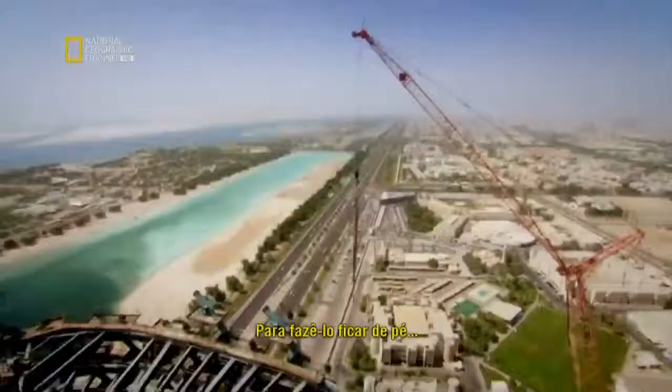Dubai is famous for its audacious engineering projects. But now, its neighboring city, Abu Dhabi, could surpass them all. This is Capital Gate, the most inclined skyscraper on the planet. It defies gravity, leaning at almost 5 times more than Italy's Leaning Tower of Pisa. To make it stand up, it'll take some extraordinary engineering that could rewrite the skyscraper rulebook.

Situated on the edge of the Persian Gulf lies the Sheikhdom of Abu Dhabi. It's the largest and richest of 7 states that unified in 1971 to form the United Arab Emirates. Abu Dhabi is undergoing one of the biggest makeovers of modern times. Its ruler, Sheikh Khalifa bin Zayed Al Nahyan, wants to join the City Super League. And he's spending over $200 billion to transform his capital into a world-class business and tourist destination.

He's already spent a reputed $3 billion creating the most expensive hotel ever built. The Emirates Palace boasts 114 gold domes and is the height of luxury, where rooms cost up to $12,000 a night. And that's not all. He's built one of the largest and most opulent mosques on Earth. Capable of accommodating 40,000 worshippers, the Grand Mosque boasts the largest carpet on the planet and the world's biggest gem-encrusted chandelier. But even these structures have not quenched his thirst for the extraordinary.

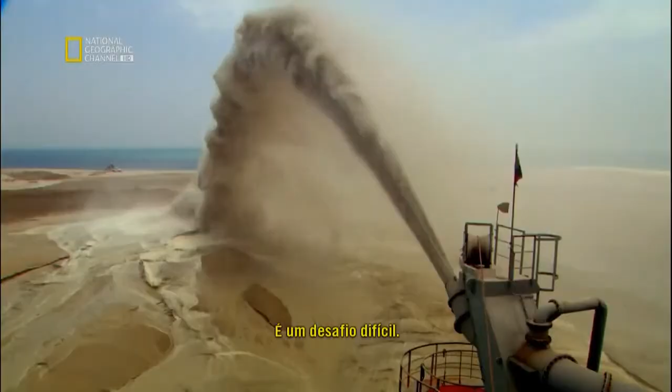It's a tough challenge. This is a land where extreme engineering is the norm. Neighboring Emirate Dubai has already built the world's tallest skyscraper, the 828-meter-high Burj Khalifa, and an iconic luxury hotel, the Burj Al Arab. Sheikh Sultan signs up a team of architects and gives them a clear brief, not to go bigger or taller, but to challenge the rules of architecture.

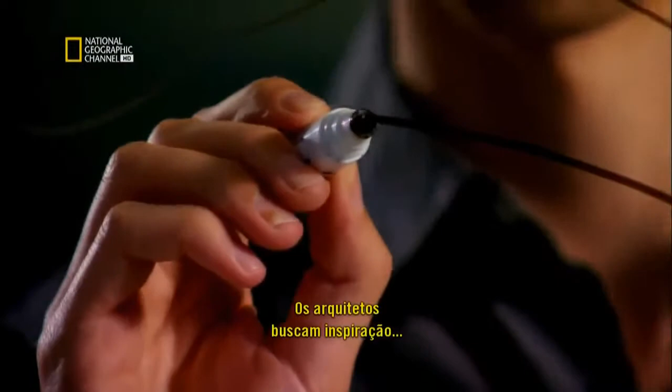For Neil van der Veen, one of the concept architects, it's a unique opportunity. The spirit of the times in the UAE was that anything was possible. Really, you could do anything. We can do something in the architecture that will represent that Abu Dhabi is right at the cutting edge. The architects look for inspiration in Abu Dhabi's landscape. They find it in the wind-swept dunes and the rolling waves of the Persian Gulf. We took this idea of wind and water, which are both dynamic, fluid type of rhythms of nature, and we said, how can we capture those in time?

As a result, you get a much smoother phase. I was really very happy when we first saw it, because with such a building, you get the first impression from the first few seconds. The team come up with an extraordinary design. A tower that spirals out of the ground to 160 meters. Inspired by a desert whirlwind and the splash of a wave rising over the sand. This gravity-defying skyscraper tilts almost 5 times more than Italy's Leaning Tower of Pisa. No single angle of this tower is the same as another. It's a structure guaranteed to amaze.

We really wanted this to happen. They could see a vision suddenly. They could see something that would stand for them. Then there was no stopping us. Sheikh Sultan wants the lower floors to become the most prestigious office address in Abu Dhabi, with the top 18 levels assigned as a 5-star hotel fit for royalty.

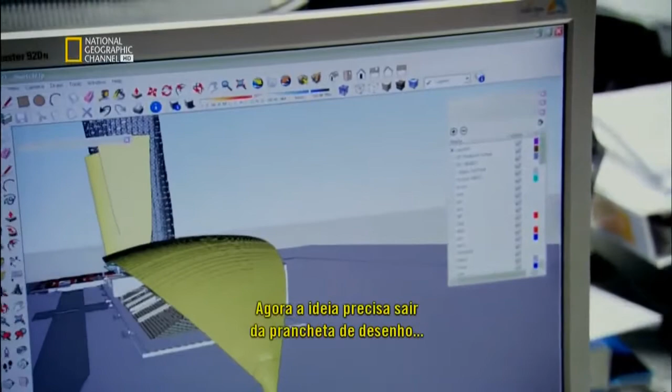Now, the idea must make the leap from the drawing board to the construction site. The only problem is, no one has ever attempted a skyscraper like this before. Everyone realized that this is a crazy structure to build, and how are we going to build it?

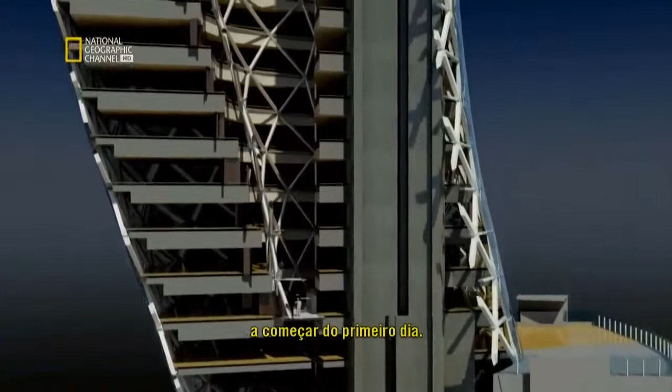To make Capital Gate's gravity-defying design a reality, it'll take some extraordinary engineering, and the challenge begins on day one. Its top floors overhang its base by 33 meters, creating huge forces that want to rip the building's foundations out of the ground.

At the construction site, project architect Tony Archibald is daunted by the task ahead. When I first joined the job, I was shown the drawings, and I kind of did a double take, and I wasn't quite sure that I got the correct understanding of the project, and it took me a few moments before I realized what we were about to undertake.

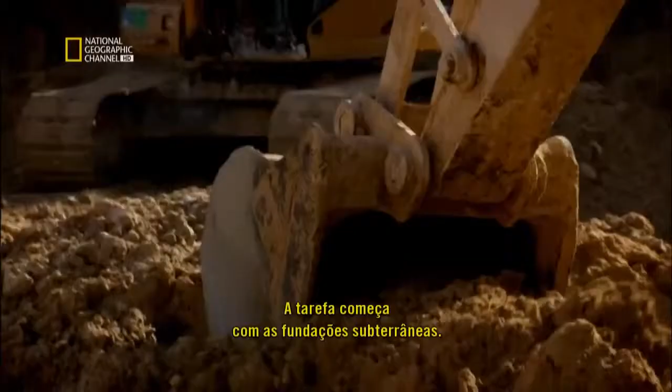Keeping Capital Gate upright is a huge engineering challenge. There isn't just one solution. To overcome the forces of gravity, it will take a whole range of pioneering techniques. But the task starts with the foundations, deep underground. On one side of the building, the weight is going down into the ground. On the other side, it's being lifted out of the ground. And that's due to the large overhang that we're having to deal with.

The solution requires almost 400 concrete piles that work in two different ways. On the leaning side, half of the piles push the overhang's forces into the ground. On the opposite side, the remaining piles anchor deeper into the bedrock. They resist the stretching forces trying to wrench the building out of the ground.

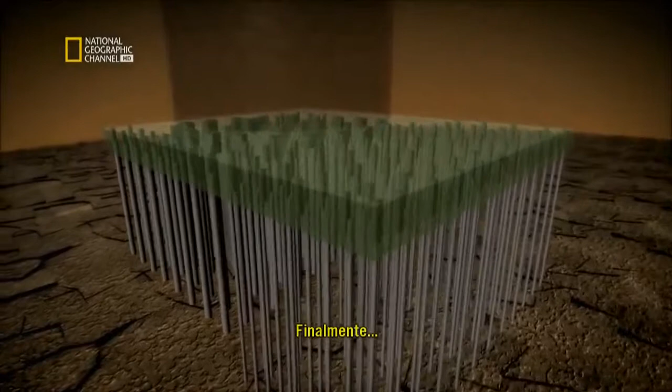Finally, to evenly distribute Capital Gate's forces into the piles, a deep concrete slab reinforced with steel is laid on top. What the foundations taught us is that every single aspect of this building has to be custom engineered.

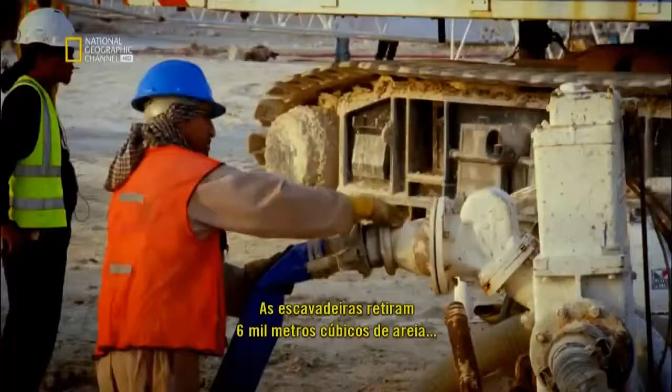Excavators dig out a colossal 6,000 cubic meters of sand. And over 8 weeks, hundreds of piles are driven into the ground. We had an awful lot of piles to put in very close proximity. It was a real difficult challenge. There can be no let-up on this schedule. Sheikh Sultan wants Capital Gate complete by an impossibly tight deadline.

In less than 2 years' time, Abu Dhabi will host the World Future Energy Summit. Over 3,000 delegates from 50 countries and the world's press will convene at the neighboring Abu Dhabi National Exhibition Center. It's the perfect opportunity to showcase Capital Gate and prove Abu Dhabi is at the forefront of innovation.

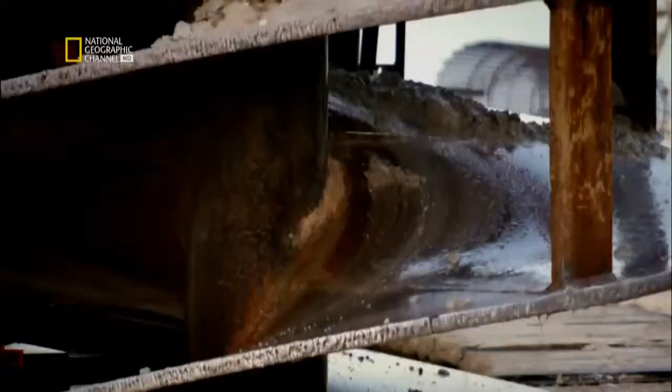But this gives the team just 24 months to design and build a unique skyscraper. With the foundations finished, building above ground can begin. But because of the dramatic lean, it will have to be constructed in a very different way to a conventional skyscraper. We realized once we'd done the foundations that this was going to be the first of many difficult problems.

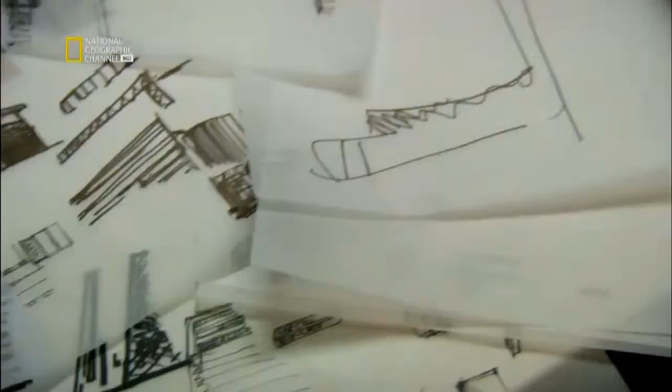A normal skyscraper requires a solid core to hold it upright. But Capital Gate's curves will just crack and topple a standard core. Engineers must discard conventional thinking and devise a way to defy gravity. Inspired by the nearby desert landscape and its wind-shaped dunes, architects have designed a curved, leaning tower. But it'll take some audacious engineering to stop Capital Gate from falling over.

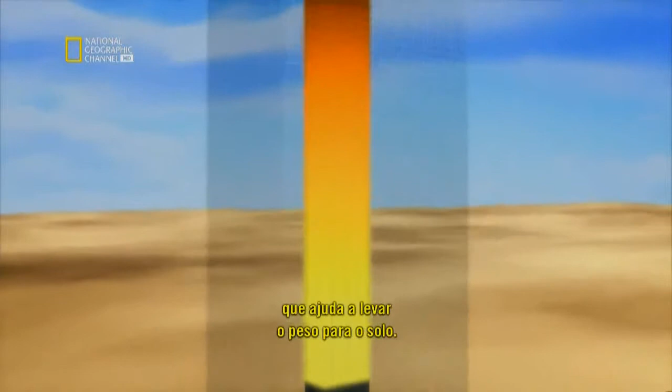Normal skyscrapers are built around a slim vertical core, which helps to channel the building's weight into the ground. There's so much overhang on this building that a conventional core was no way going to work. You just can't build a straight core. It's just not strong enough. Capital Gate's design would cause a conventional core to bend dangerously. The pull of the massive overhang wants to stretch the core on one side, causing the concrete to tear apart.

Structural engineer Mona Vassi knows it's a serious problem that must be solved. When I saw this one, I thought it's impossible, it's not going to work. It's just some sketch somebody left somewhere. But I always think that for the architects, it's easier for them to just draw something, but it's not easy for us to fulfill or satisfy their needs.

The engineers developed two groundbreaking solutions. The first part of their plan is to build the core with a curve, bending in the opposite direction to the building's lean. As the structure grows, its weight pulls the core straight. In total, it shifts 350 millimeters, and the effect is significant. The concrete that would have been stretched by the overhang's pull will now be compressed and strengthened.

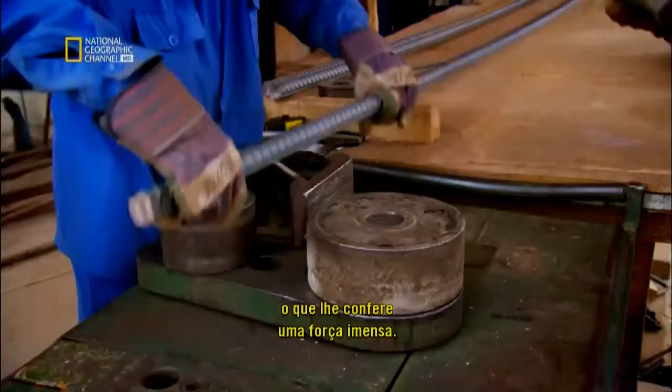The core grows 4 meters a week, and construction manager Les Fairchild is in charge of building it. This is probably the most complex core that I've come across. It's built at an angle, and effectively the core holds the whole building up.

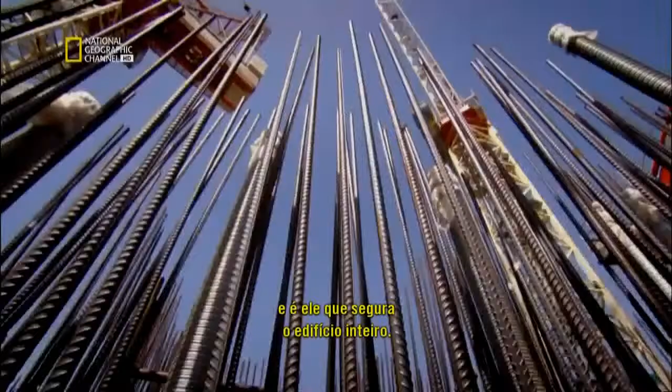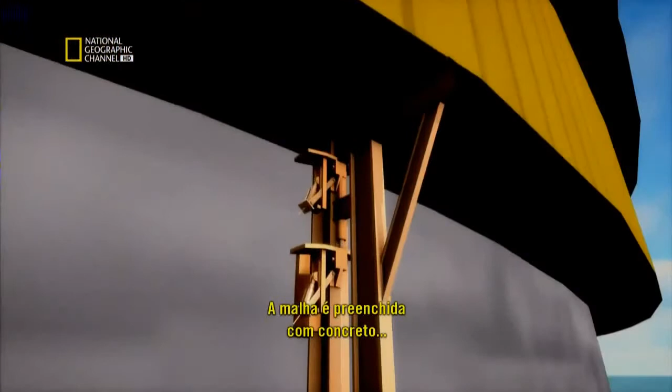The core is built using a technique called jump forming. First, a dense mesh of steel reinforcement is assembled. A mold then closes around the steel to form the shape of the core. The steel mesh is then filled with concrete. Then the mold or form can climb up the core wall for the process to start all over again.

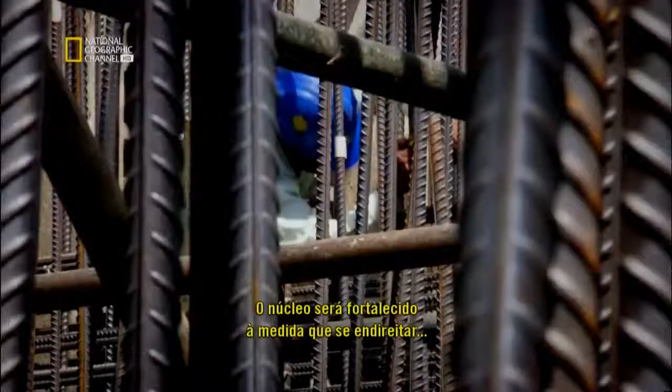Jump form is a hydraulic platform. Once we've cast each 4-metre level, we simply attach it to some runners and we jump it hydraulically up to the next level. The core will be strengthened as it straightens. But for the core to carry extreme loads, the concrete must be reinforced using steel rods called rebar.

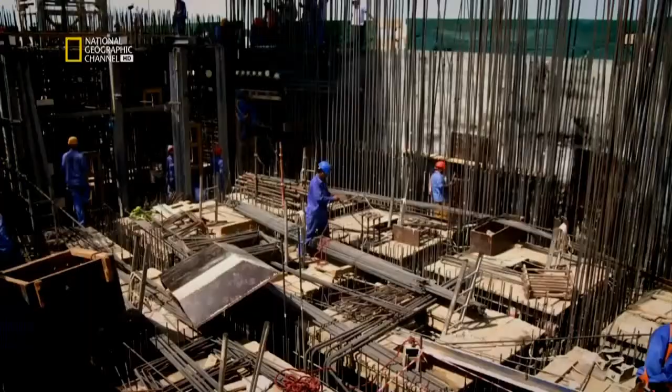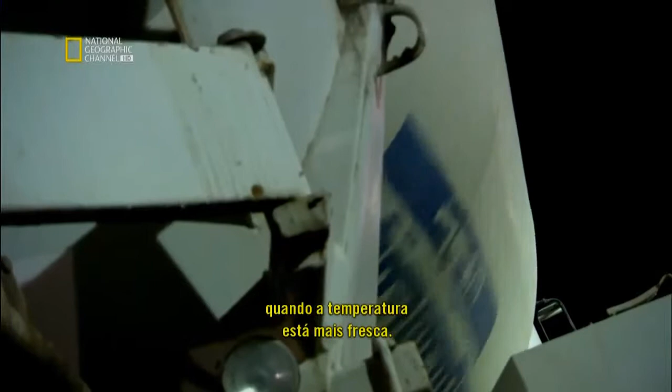The rebar is installed during the daytime, but temperatures of up to 50 degrees Celsius and concrete don't mix. It dries too fast and could crack. To set at the right speed, the concrete has to be poured during the cool of the night. As the core grows higher, the liquid concrete has to be pumped over longer and longer distances. So the consistency of every batch is first checked in a slump test to ensure it won't block the pipes.

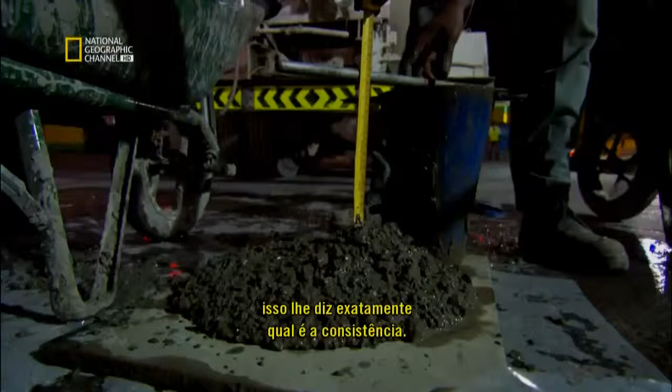When you first see it coming out the wagon, you can usually tell whether it's a tight mix or whether it's a loose mix, and that's what we're testing for really in the slump test. We simply make a cone, lift the cone off, and depending on how much it reduces in height, tells you exactly what the slump is. The one we just witnessed is 215 millimetres, which is within the specification, so that's good to go.

Whilst the truck drives to the pump, Fairchild needs to get onto the core. He can take the stairs, but 90 meters up is a long climb. He knows a much faster way. Crane lift.

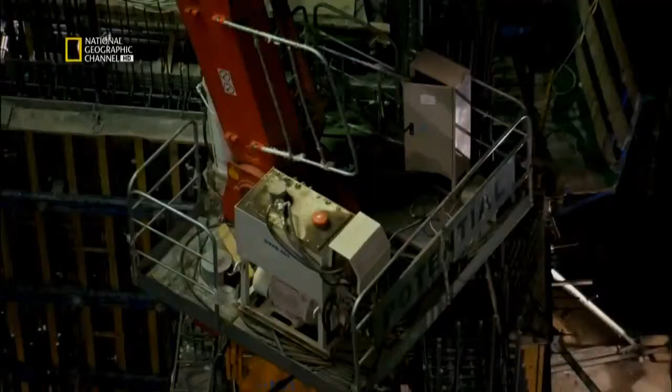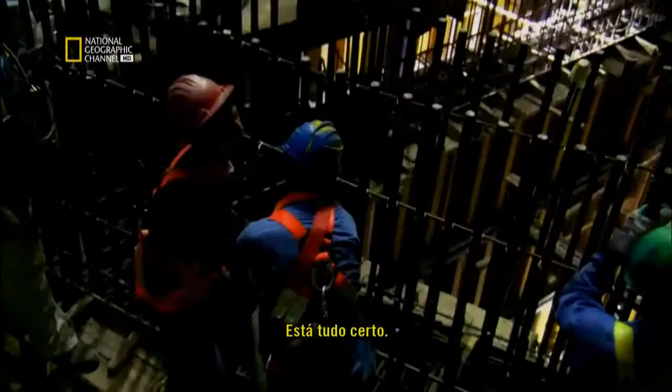It's going fairly well. We've had a nice continuous supply of concrete, and we're now pumping it up to the upper levels of the building. And the lads are just steadily working away. They actually work from one side to the other in metre deep layers, so they're doing everything right. It's always exciting when we pour concrete. It means it's another achievement really. We're going up another level.

But building the core out of alignment and packing it with rebar still isn't enough to stop gravity toppling Capitol Gate. What we came up with is a post-tensioning solution where we introduced much more reinforcement into the core wall and then used the tensioning process. Basically that was done by introducing high tensile strands to the centre of the walls.

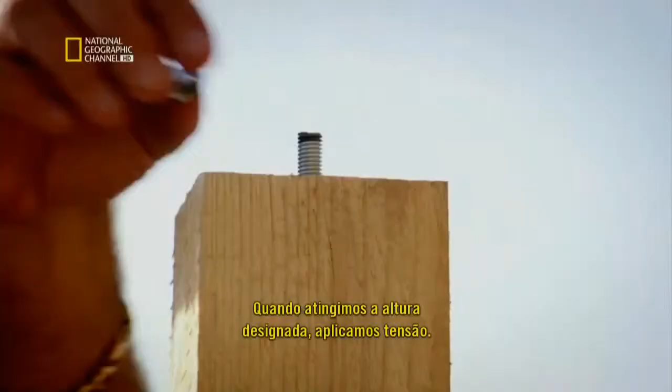When we reach the designated height, we simply apply tension. We're actually stretching the tendons that fall through the wall, and we're actually pulling them tight, and that's done by a tensioning machine. So effectively, when the tension is complete and the load was applied, the core would stay intact, and the additional reinforcement would prevent it from falling over.

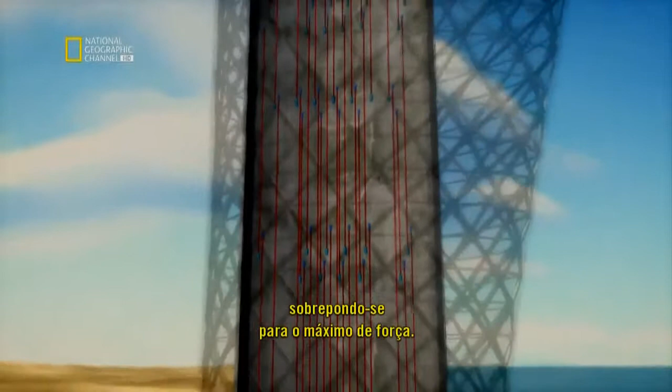To post-tension the core, 146 steel tendons are threaded vertically through the concrete. Each tendon is 20 meters long and runs through 5 floors of the building, overlapping each other for maximum strength. When the tendons are stretched, the stress counteracts the pulling force created by the massive overhang, stopping the concrete from tearing apart. Okay, stop. Okay, start moving.

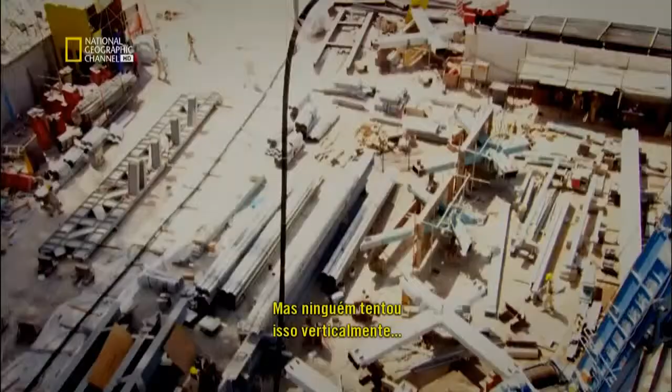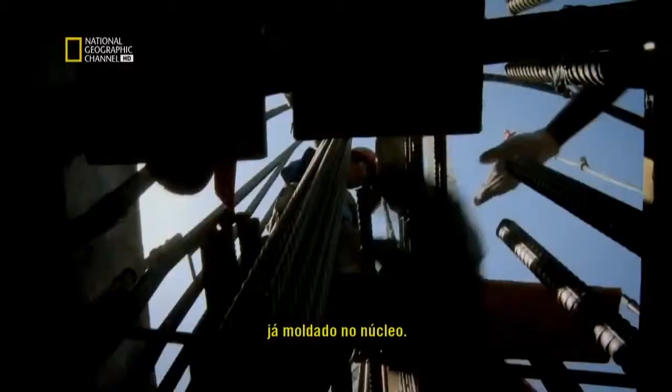On site, the team are post-tensioning the core, but no one has ever attempted this vertically in a skyscraper. The long tendon is lifted to the top of the core. The team used the steel tendon's weight to force it through a duct already cast through the core. Once the tendon is in position, the team lock off both ends, ready to tension its individual strands.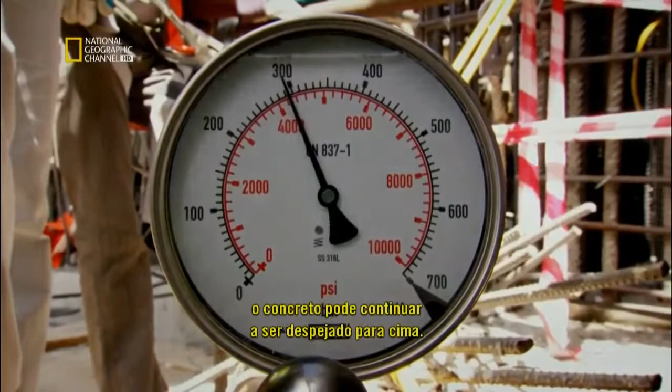A pneumatic jack clamps around one strand at a time and stretches it. It's equivalent to about 5 family cars pulling on one end of the rope. With the steel tendon now stretched to the right stress level, concrete pouring can continue upwards. The quantity of cable that's been used is approximately 120 tons and 120,000 meters in length. It's about 44 times the Golden Gate Bridge. This process is repeated over and over and means the core should withstand the huge loads generated by Capital Gate's extreme overhang.

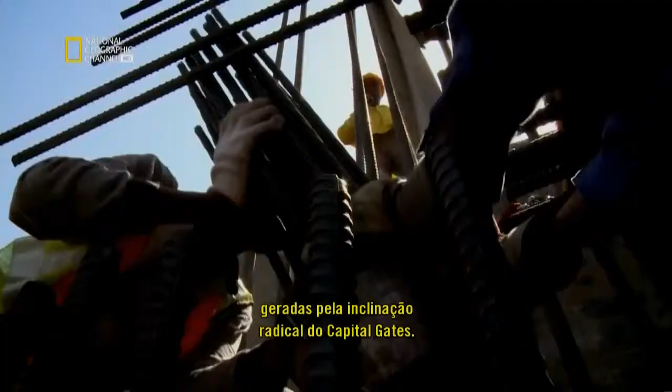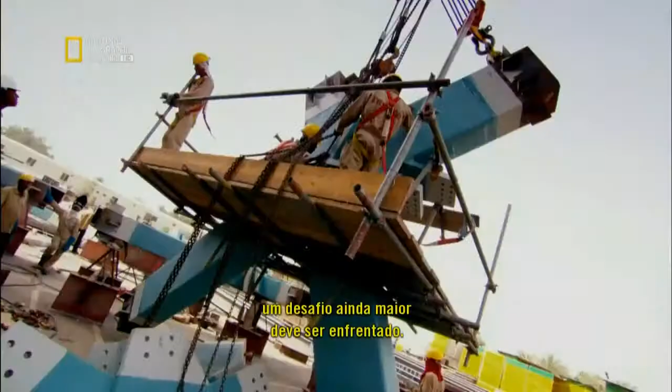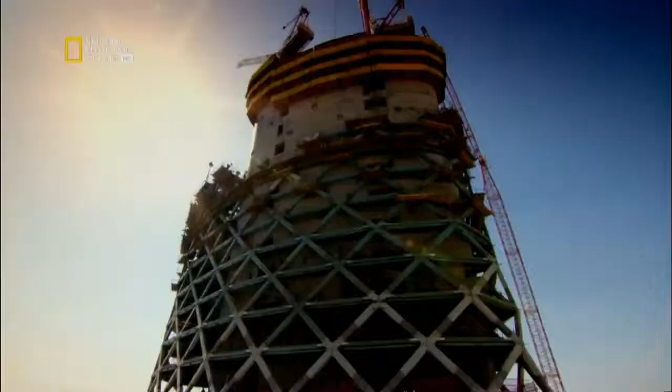But now, an even greater challenge must be tackled. The building's twisting, leaning design must somehow be turned from theory into reality. And once again, it'll mean bending the rules of architecture. To create Abu Dhabi's architectural icon, Capital Gate needs an exterior curved leaning frame. But once again, the building's extreme tilt creates a problem.

The shape of the building with this very pronounced overhang meant that traditional skyscraper building solutions just weren't going to work. There's no way. The building design requires it to be thin to maximize floor space and allow for huge panoramic windows. Irfan Ahmed is one of the engineers who has to find a solution. For structural engineers, it's always challenging to accept the architectural requirement, you know. They always want thinner and thinner and thinner.

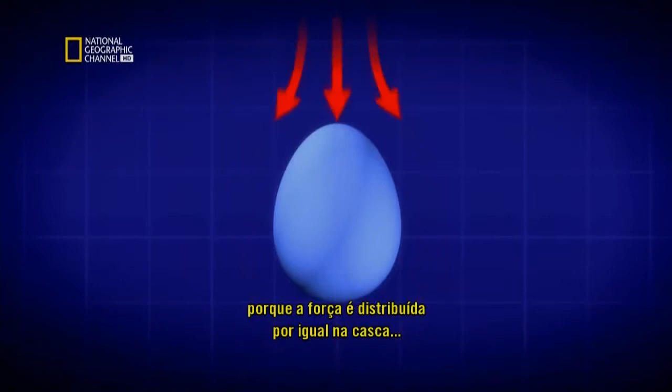Surprisingly, the humble chicken could help with this engineering dilemma. It is essentially a skin of structure around the outside of the building, not unlike an egg. An egg can withstand huge loads because it evenly distributes forces down through its shell, which means the shell can be thin, creating more space inside. So it's very, very thin, it's very, very strong. If I try to crush this egg, you can see that it's actually amazingly resilient. So let's see how resilient.

Here I have 170 eggs laid out, and we're going to put load on top of these in the form of breeze blocks. Moment of truth. So far, so good. Each one of these blocks weighs 15 kilos. So we've nearly got half the weight of a car on here now, on our 170 eggs. Let's see how far we can push this.

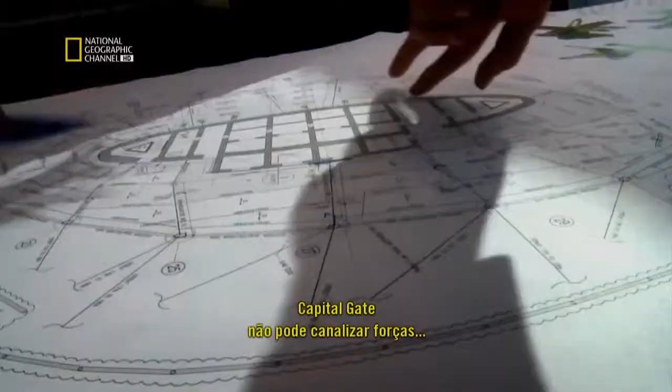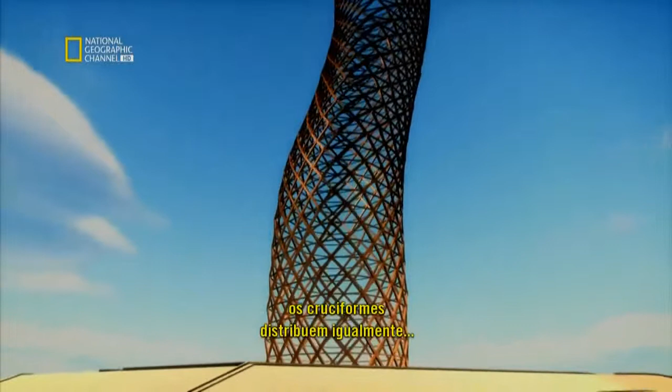Capital Gate can't channel forces with eggshell, but it can use the principle of how it works, using a diagrid. A diagrid is a giant mesh of steel that wraps around the core. Steel beams connect to a node or joint to form a cruciform section. 720 uniquely shaped sections link together to form the thin but immensely strong diagrid. Working together, these cruciforms equally distribute the forces down the outside of the building. The way it does that is by making a uniform net, so that the forces are very evenly distributed, and that means that we can get away with slenderer sections.

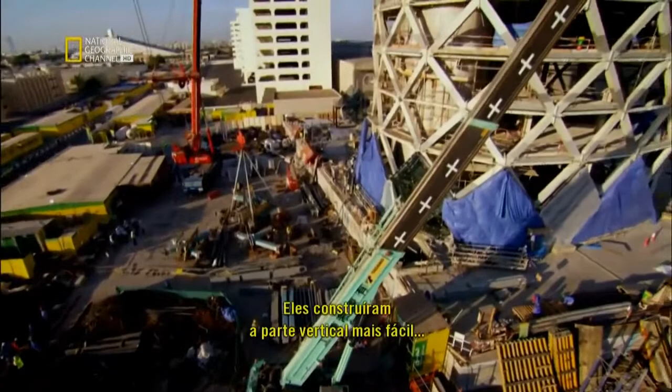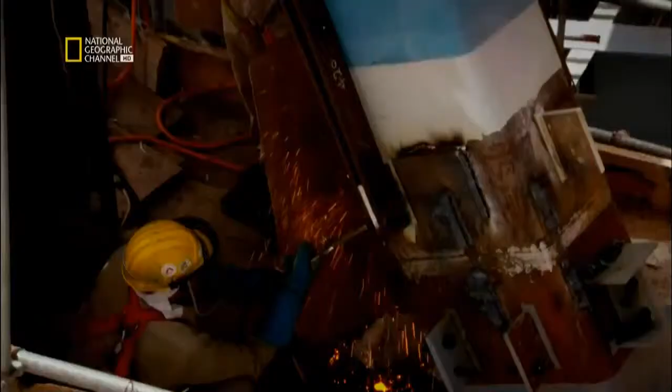On site, a team of 240 steel fabricators assemble the diagrid. They've built the easier straight part of Capital Gate's base, but now the structure is starting to lean, making installation even more challenging. Each cruciform, weighing up to 16 tons, has a unique geometry and must be crane lifted at a precise angle. If the diagrid is not assembled with millimeter accuracy, the mesh will not channel the loads and the structure could be weakened.

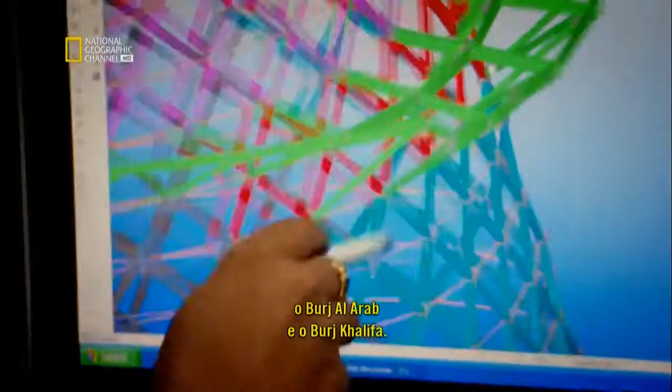The engineers must communicate closely with the expert steel fabricators. They design and manufacture the diagrid 150 kilometers away in the neighboring emirate, Sharjah. Here, cutting-edge construction is the norm. They've built one of Malaysia's Petronas Towers and Dubai's iconic skyscrapers, the Burj Al Arab and the Burj Khalifa. But Capital Gate's revolutionary design pushes even these experts to the limit.

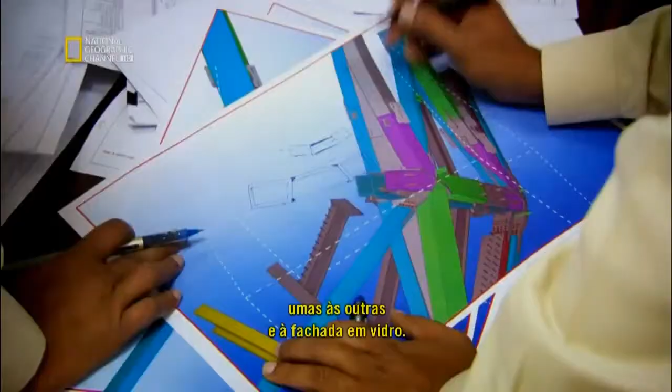On the planning floor, project engineer P. Bhaskaran and his team need bespoke 3D software to tackle the building's highly complex diagrid. The 3D modeling is done, and any unforeseen criticalities will be very clearly identified in the 3D model. Each one of the 720 cruciforms is precision engineered, not only to channel huge forces, but to connect with millimeter accuracy to the neighboring cruciforms and the glass facade. But to measure their exact angles, the team used some old-school technology: chalk. It might look unsophisticated, but it's highly accurate, ensuring all the elements will join together.

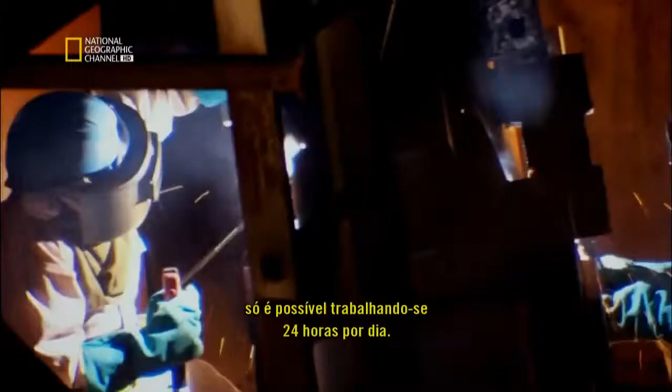To keep up with construction, the factory must produce 18 cruciforms every week. Constructing such a huge building, a critical building within the short span, without working 24 hours, it is absolutely not going to happen. As the skyscraper reaches new heights, the long hours start to pay off. This design pushes the diagrid technology to its absolute limit, and in fact far beyond what's ever been achieved so far. Even in your dreams, you're thinking about this project. So once you see the structure coming up, you forget all the long hours you spend and all the sleepless nights.

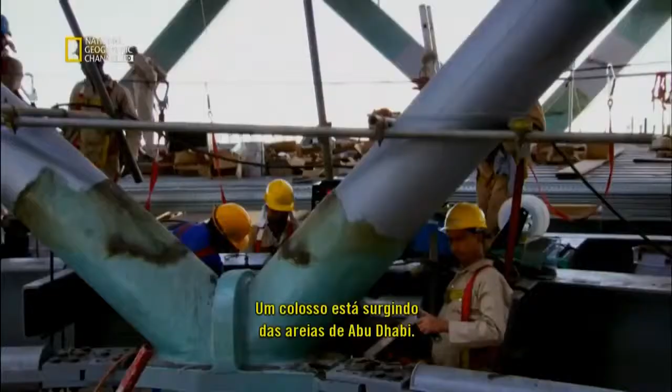A colossus is fast emerging from the Abu Dhabi sands. Now, this leaning tower must be clad with a glass facade. And as always with this gravity-defying structure, it's going to require some revolutionary engineering.

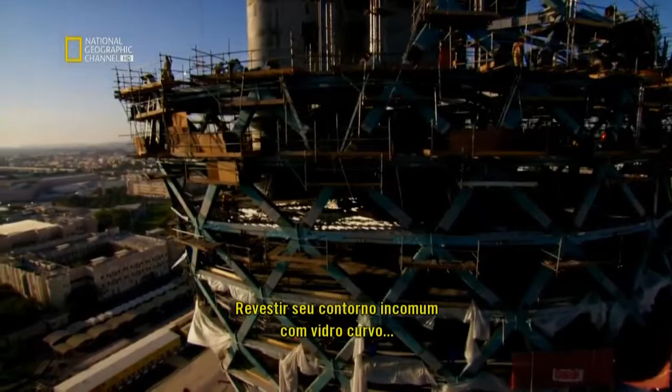Glazing Capital Gate's leaning curved frame is a major problem. Covering its unusual contours with curved glass will blow the budget. So the skyscraper's curves must somehow be clad using cost-effective flat glass panes. Fortunately, ancient Greek geometry can help.

Because you've got a complex shape, it's an organic shape, it's a curved shape. The only way to model that with straight lines is to use triangles. Triangular panes can pivot in 3 directions, and when joined together can cover complex geometric surfaces. But because every angle of the building is unique, it'll take 26,000 triangular panes to form the facade.

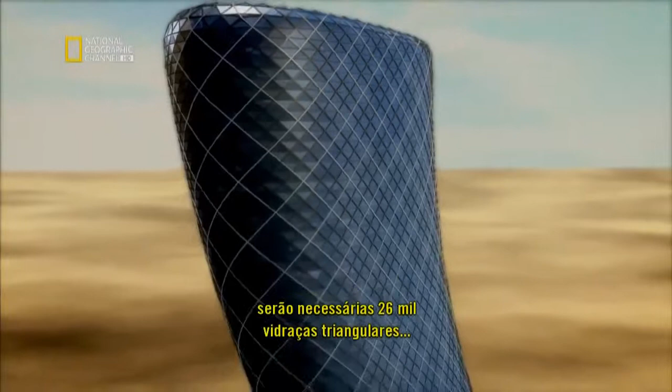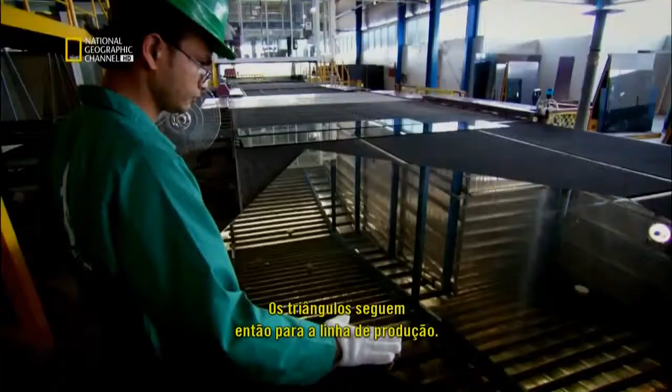With so many glass triangles to cut, the local glass factory springs into action. Each pane is scored by an automated diamond cutter to an exact pattern. The triangles are then sent along the production line. The team is under constant pressure to deliver enough glass to the site. Hey, this side, 2 guys, hold it.

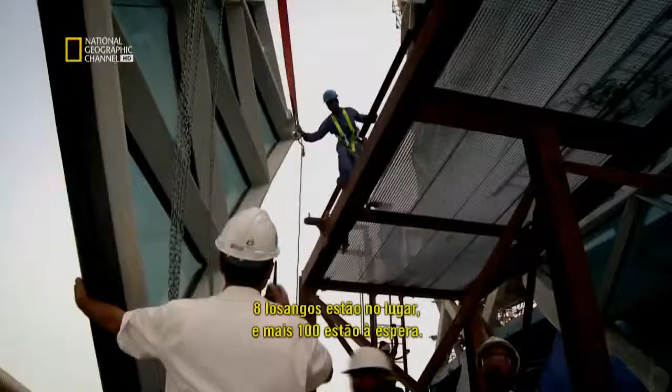After several weeks, 8 diamonds are in place and another 100 standing by. But the glass design is so unconventional, it still has to pass a number of tests to prove it's up to the job. Because we'd already started the glass installation, the results of this test were absolutely key. Each panel is stacked one upon the other. So if we'd had any kind of problem, we would have had to unstack them, which would have had disastrous consequences for the program.

This is no ordinary glass skin after all. Capital Gate's core straightens as it grows. The skyscraper will not stop moving until after completion. Normal glass facades can accommodate minute movements caused by wind and temperature changes. But to stop the glass shattering and keep the building watertight, the panels must be designed to shift by up to 20 millimeters. The scale of that kind of movement is almost unheard of in glazing systems. It's a vast amount of movement.

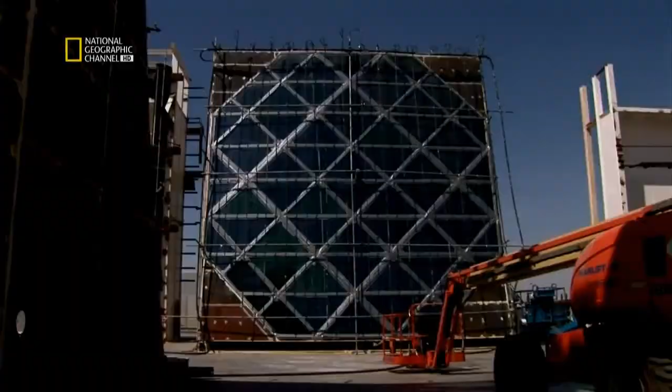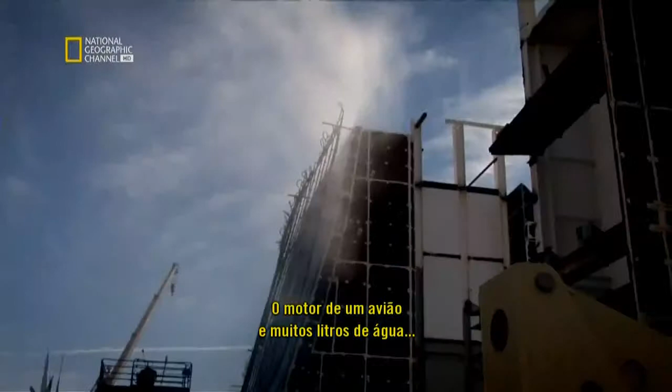With glass installation ongoing, construction manager Craig Rooney needs to know the panels will perform. We don't want to get to the top, we've done it, we've installed it, we think we've done a great job, and then it all leaks. The panels must be tested to the limit at a Dubai laboratory. A plane engine and many litres of water simulate worst-case scenario weather.

Now the moment of truth. Any leaks could be a disaster. And it's bad news. The first time we got a full water test, we had a leak. The fact that we had a leak was devastating to the whole team and very alarming. The diamonds connect to each other by a bespoke two-layer seal. The flexible spongy seal allows the diamonds to move and keeps water out. But if any water does seep through the outer seal, drainage tubes fitted at intervals let the water flow away.

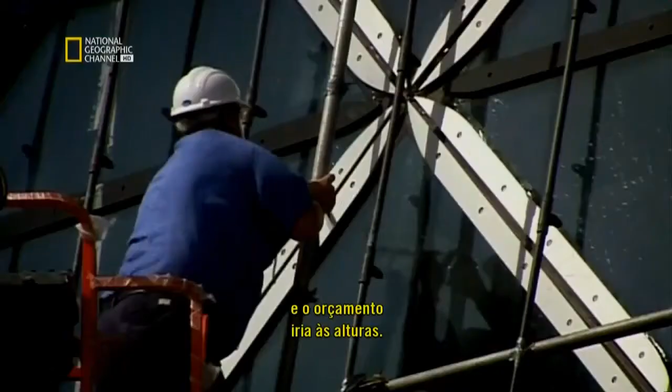The panel has failed the test. Water has flooded inside and penetrated the inner seal. If it was a fundamental failure, we're back to the drawing board, so the cost and the budget and the program all go completely out the window. The panel is examined. Answers are needed fast. Fortunately, it's not a design failure. They discover a drainage tube is only blocked with sand. The problem resolved, installation can step up a gear.

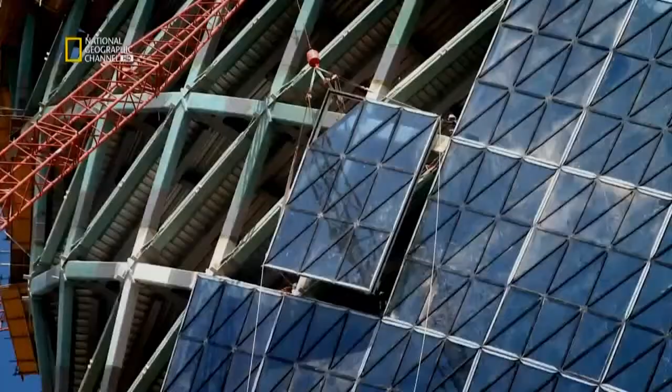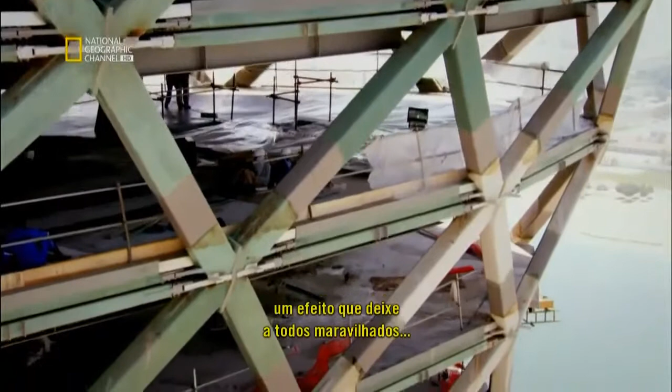But as always with this audacious building, one problem is solved and another is just around the corner. To give Capital Gate's five-star hotel lobby the wow factor, architects again plan to push the design to the extreme. Now they want to build an infinity pool and a restaurant, hanging 100 meters above the ground.

18 months into the build, Capital Gate's design is about to give a new slant on high-rise living. The architects want a pool deck and restaurant suspended in the sky, but it's an engineering headache. There's so many requirements that architects have that really put us in so much trouble as engineers, but you want to make sure you have a safe structure. The design calls for a two-story extension, hanging without any visible support. But the pool's water alone will weigh 150 tons.

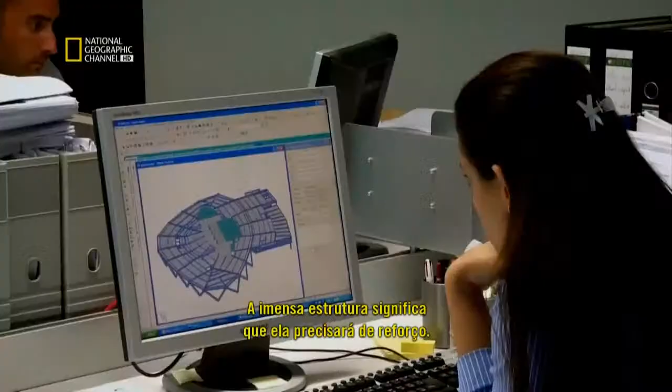The structure's huge mass means it needs reinforcement. We needed some supports from below, otherwise there was no other solution. I don't think you can have a cantilever that huge on this building, no way. The design will only work if it's underpinned with 22 steel struts. They will carry the loads back into the building. But the struts must also look delicate to meet the architect's aesthetic demands.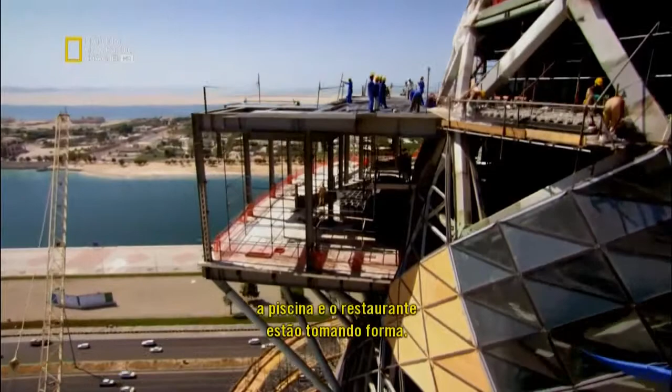On the construction site, 90 meters up, the pool and restaurant is taking shape. All of its structural elements are in position, except one. The team are raising its last 6-ton floor beam.

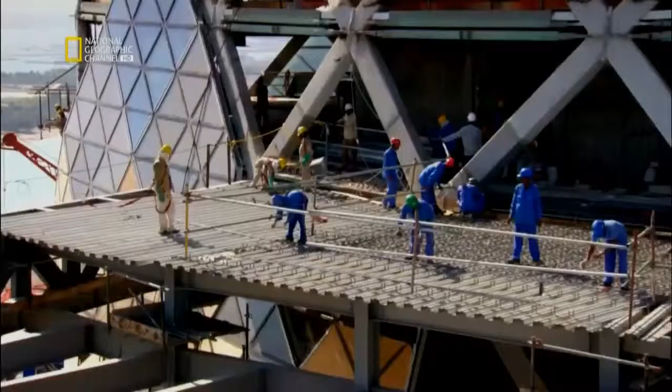It's taken many crane lifts, but one of the highest suspended swimming pools in the world has made the leap from blueprint to building. See all those lines that you just drew? They're actually drawing the same thing for you, but with a crane. But the feeling is indescribable.

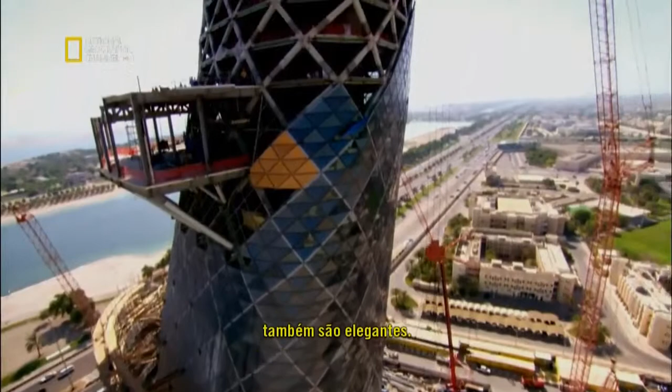And the structure's muscular struts and connections are also elegant. The idea behind these junctions is that they behave like the insects that can walk on water. They're sufficiently light that the surface tension keeps them above the water. So these little brackets dissipate the forces from all that weight.

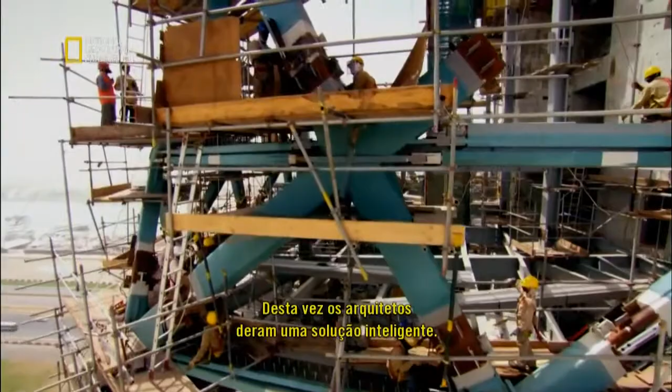Capital Gate is fast becoming an Abu Dhabi landmark. But the taller it gets, the more the weight of its upper floors is a problem. The skyscraper needs to go on a diet. And this time, the architects come up with a clever solution. The building has lots of visual surprises.

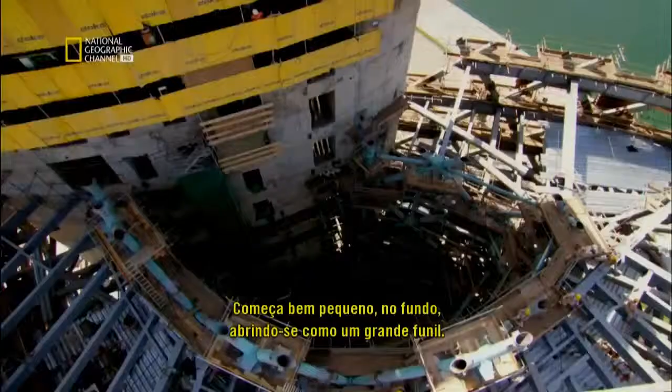And one of the most important ones of those is the internal atrium. It's a kind of a light well that brings light from the sky deep inside the building, and it extends over half the height of the building. So it starts out very, very small at the bottom and opens out in a big funnel. This cavernous hole is good news for reducing weight and minimizes forces.

But the atrium is a double-edged sword. The floors are critical in transferring loads from the diagrid to the core. A giant hole through 18 floors means these loads must find another pathway. It's a very, very big hole in every single floor plate. So our engineers really have their work cut out.

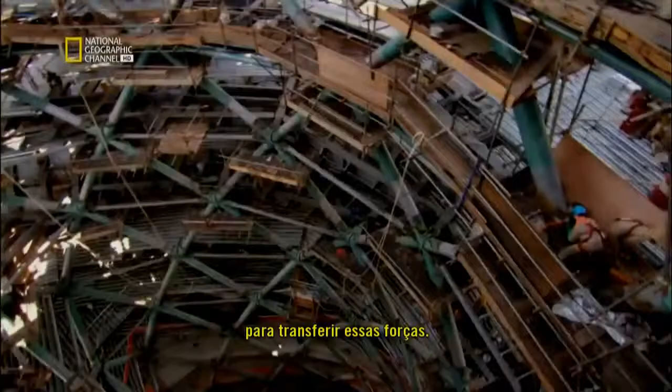You don't want to have an opening in your floor. You want to have more concrete, reinforced concrete, to transfer these forces. The forces need to flow away. And the solution is pioneering. An internal web of steel mirroring the external diagrid. This is the first time we've ever heard of this being done.

The internal diagrid is actually a fundamental part of the structure. This funnel-shaped internal skeleton carries the forces of an 18-story building down to its tapered base and into the core. But the loads are extremely high for such a small area. To stop the atrium punching through the core wall, the concrete needs protection.

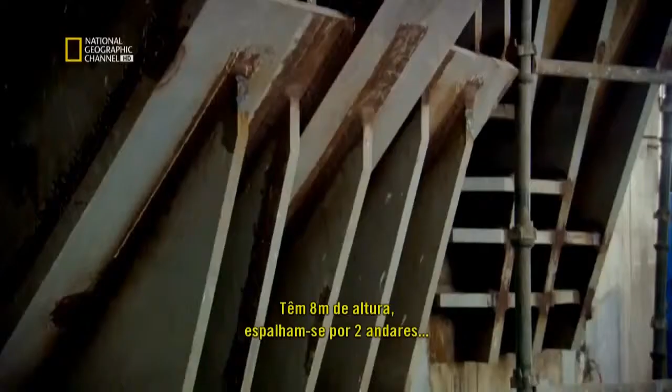The answer? 6 giant plates of steel that brace the connection to the core wall. The connections are really a wonderful, wonderful piece of engineering. They're 8 meters high, they span 2 floors, and they connect back into the core. The atrium's near completion brings Abu Dhabi one step closer to achieving an iconic landmark.

But as the sun goes down, this isn't the only celebration underway. On site, the Indian steel team are holding an annual blessing to the Hindu god Lord Vishwakarma, the protector of architects and engineers. Their livelihoods depend on staying safe, and although they use safety equipment and are highly skilled, working with huge sections of steel at height is never risk-free.

We pay our respect to God and get the blessings from the God. We do that for the safety of all our workers and for the proper completion of the job. Every trade of workers we take, the basic tools they are using on site, that has to be kept in front of God, and the workers feel themselves that they are in safe hands. The tools are now blessed, and the steel team's morale is high.

But the glass installers, lifting diamonds to over a height of 100 meters, are getting the wrong kind of lift from Abu Dhabi's highly unpredictable wind. If the wind is too strong, then you can feel this in your hands when you hold these diamonds by rope. I always get nervous if I see the panel starting turning. And this makes me always a little bit afraid when I see diamonds going up and starting moving.

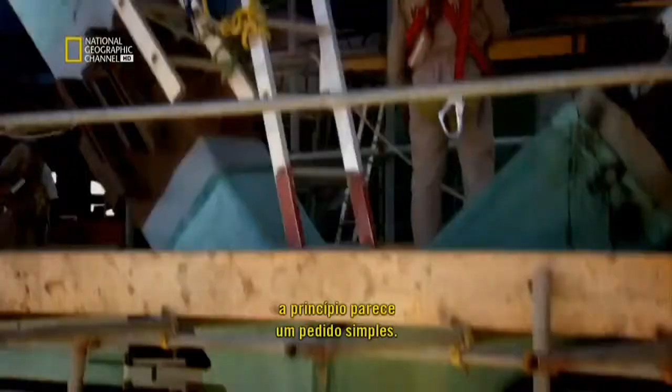Integrating what will be Abu Dhabi's highest helipad atop one of the world's most daring skyscrapers at first seems a simple request. But it actually poses 2 serious problems. It'll create new forces that must be absorbed by the already strained core, and unpredictable wind flows that can cause potentially lethal flying conditions. You get a thing called wind shear, tipping the whole helicopter onto its side. And this is a very real and very dangerous risk.

These rapid wind changes, known as wind shear, can affect the lift on helicopter blades. Aircraft can be blown off course, or literally fall out of the sky. There is no way that we could have any margin of error on the safety. The only way we could predict what the wind shear would be like on the top of the building was to model it in a wind tunnel.

In London, England, a scale model of Capital Gate is put through its paces in a high-tech wind tunnel. Just as the team fear, within seconds, wind shear conditions appear. Air currents are flowing over the top of the building, but then separate from the surface, spiraling inward to form a realm of turbulence. Wind engineer Leighton Aurelius knows the consequences could be serious. If the pilots lose control in this random ball of energy here, they may in fact end up crashing onto the helideck, or even worse, onto the tower itself. I'm sure that can occur.

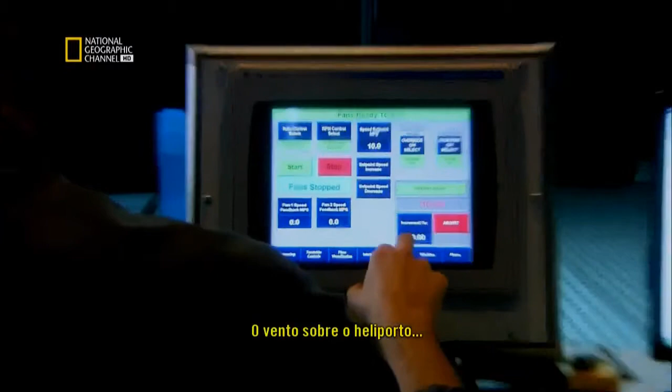But that's not all the wind tunnel test reveals. Wind impacting the helipad is also creating huge suction forces. We're talking about very large forces here wanting to pull the helipad off the top of the building. Something in the realm of several large trucks or big rigs trying to pull this helipad away.

To make the helipad safe, Aurelius and his team have to go against conventional thinking. We didn't think that lowering the helipad was actually going to be the optimum design, but we see reduced loading on the helipad as well as safer conditions for the pilots to land in. Lowering the helideck to just 2 meters above the roof dramatically decreases the wind shear threat, and means Capital Gate's core will withstand the additional loads.

We're relieved, frankly. The tests have actually confirmed now that we can actually have it in our original design position, which is very low, which will mean that the profile on the skyline is exactly where we want it. But it'll take another 5 months to just draw up the helipad's blueprints, and a crane must be left behind to build it.

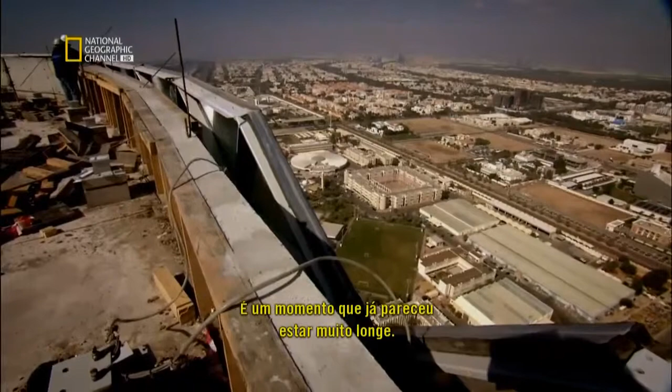Now, with only weeks to go until zero hour, the team are installing one of the last glass panels. It's a moment that once seemed a long way off. In my office I have a plan of all the diamonds we have to install, and in the beginning it looked like I'm in jail and I'm marking the wall with marks for each day. And so at first I felt I'd never finish this project. Just 10 months since the first diamond was fitted, the facade now shimmers in the sun.

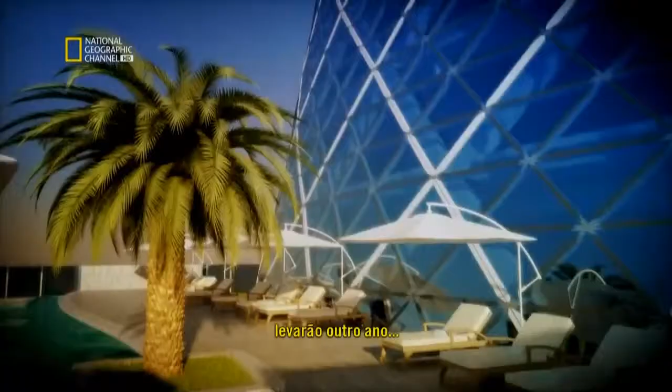Capital Gate's internal fit-out will take another year. Only then will its 5-star hotel and Abu Dhabi's most unusual office address be open for business. But against the odds, the team have created one of the most extraordinary megastructures on the planet. Capital Gate twists and spirals out of the ground, soaring to a full 162 meters. It's taken nearly 6 million man-hours to construct, and its overhang is spectacular. You see the building and you stand underneath the overhang. It's extremely impressive. It's a fantastic feat of engineering.

I feel as though I've been here an eternity, but it's probably been the quickest 2 years of my life. It's been an amazing journey and we've learned so much. And actually I think we've demonstrated that some things that looked impossible or even ridiculous were actually possible. And Abu Dhabi's past will soon be physically linked to its future by a wave of steel that'll rise over the grandstand and splash up the skyscraper's mirrored glass. Abu Dhabi is a fascinating part of the world to be at the moment. It says to people we can step outside of the box. We don't have to follow the rules.

With the 2010 World Future Energy Summit just weeks away, Sheikh Sultan can be sure Capital Gate will show the world what Abu Dhabi is capable of. This building is really iconic. It catches the spirit of Abu Dhabi and will be part of the postcard image of Abu Dhabi. The team have achieved what some thought was impossible. A leaning tower that claims the world record for the most inclined skyscraper on Earth.